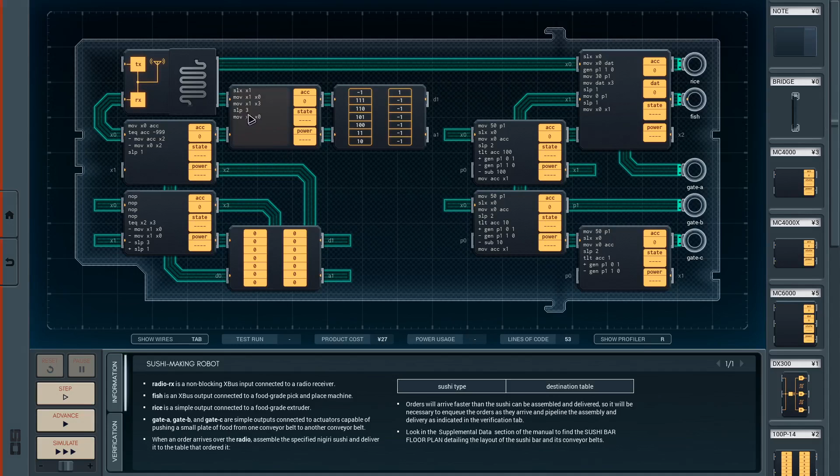Gen P1, 1. Do I need to sleep or something? Yeah, there's some sleeping involved. So this is going to improve every graph. That'll be very nice. You sleep 3 and then you send the data. Okay, so you sleep the first, of course. Oh, and I don't even have the sleep 3 in here.

Great. Can I get away with more sleeping? Or will this fail? That will fail. Okay, so no I can't. Alright, that's fine. Okay, well, that's a real nice improvement.

So yeah, it just reads from here whenever it's ready to serve it. It'll sit there in the queue for a moment, but instead of making my own secondary queue on top of this one, I can just use the built-in one in the radio. There we go! Now this is a good solution.

Beautiful. Okay, so power usage all the way down there, lines of code down here, product cost down here. Hugely beating the average on everything. That's fantastic. I got to the second average on power usage.

Alright, I don't want to spend more time. I want my fourth graph to also be to the left, so I'm not going to spend any more time on that, but that is a satisfying improvement on that. Yeah, look how much better these all are. 2 ticks left, everything. Cool. Alright. Thanks for that tip.

Yeah, so, just a thing I had forgotten, apparently. As promised, I have a serious job for you. You're the one I fed, whose kitties I fed.

There will be custom displays to report current status of each component for monitoring and control of my thorium reactors. A bit more interesting than cats, maybe?

I was interested in your cats. You gave me a cool picture. Let's look at it again. Cute kitties. Yeah, I don't know who the third one is still.

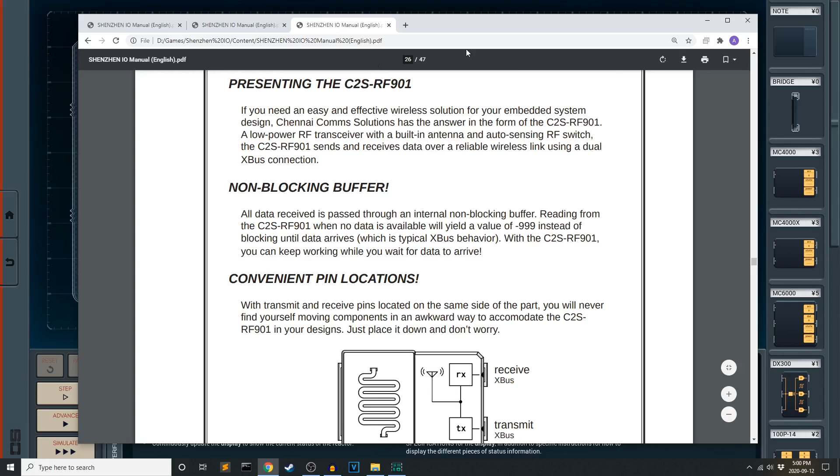So, thorium reactor status monitor. I want to say there's a spec for this. Thorium salt reactor custom LCD spec. Yeah, okay, check it out.

It's this thing. Error is an X-bus input indicating the current reactor error, if any. Okay. Blocking, because it doesn't say non-blocking. Great. So those are both good in their own ways. But yes, note that this is blocking. Power is a simple input indicating the current power output of the generator. Temp is a simple input indicating the current temperature of the reactor's core.

This is sounding like a pretty dangerous project.

Control is a simple input indicating the current state of the reactor's control.

No, thorium reactors are extremely much safer than uranium nuclear reactors, I happen to know. Also, I think thorium reactors are slightly theoretical currently. I want to say that's in active research, but might not actually have a working implementation in the real world at the moment. Not sure about that part, though. My brother knows a lot about this stuff, but I don't.

Control is a simple input indicating the current state of the reactor's control rods. Display is an X-bus display output corresponding to a Lux 900C custom LCD.

Continuously update the display to show the current status of the reactor. To turn on a display segment, send that segment's ID to display over X-bus. To turn off a display segment, send that segment's ID multiplied by -1.

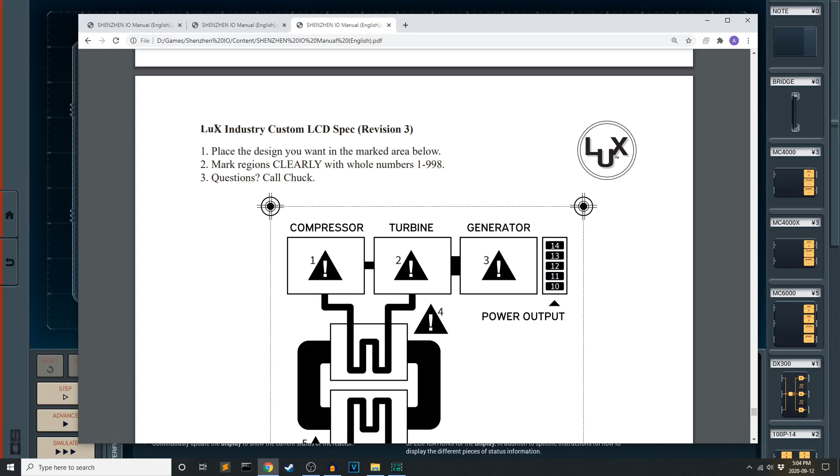Call Chuck. Okay, it is Lux. I said it right. Lux Industry Custom LCD spec, revision 3.

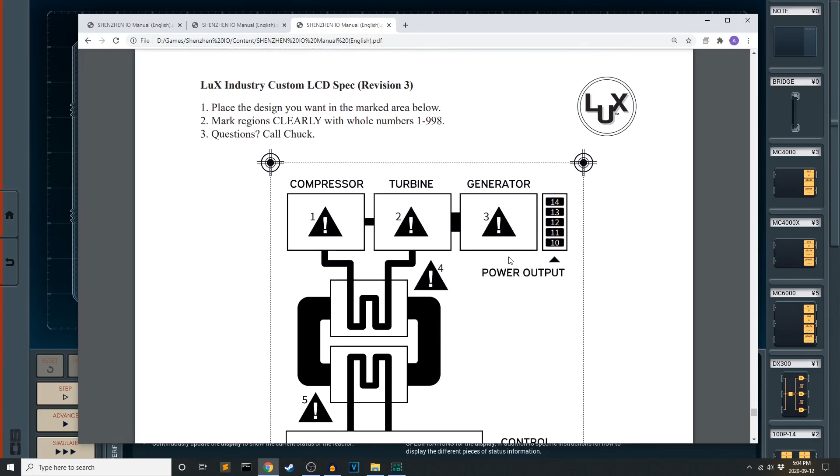Okay, so one control rod there. So you're saying control rods, okay, so these are LCD segments. Okay, and this is how to map those.

Alright, so I'm going to have some thresholding, because I can't really do a divide by 20. Can I do a divide by 2? Didn't I have a thing where I did a divide by 2 and it wasn't too much of a pain? Yes, multiply by 5, DGT1. To divide by 20, multiply by 5, DGT2. Okay, so multiply by 5 DGT2 and I would get an index of these.

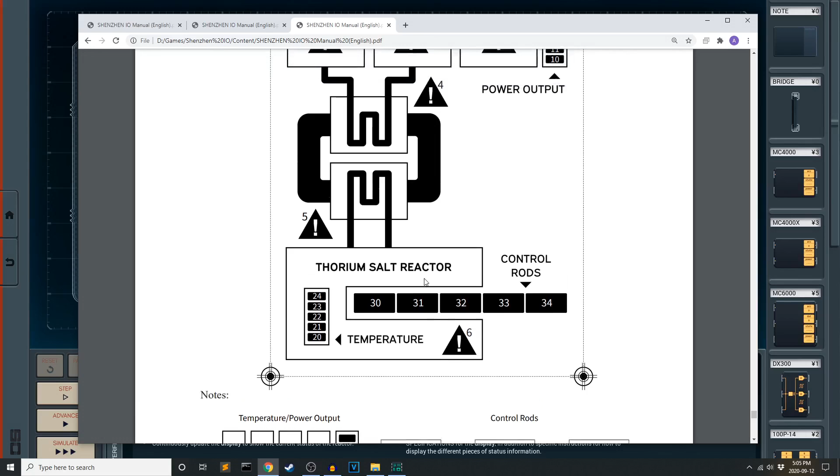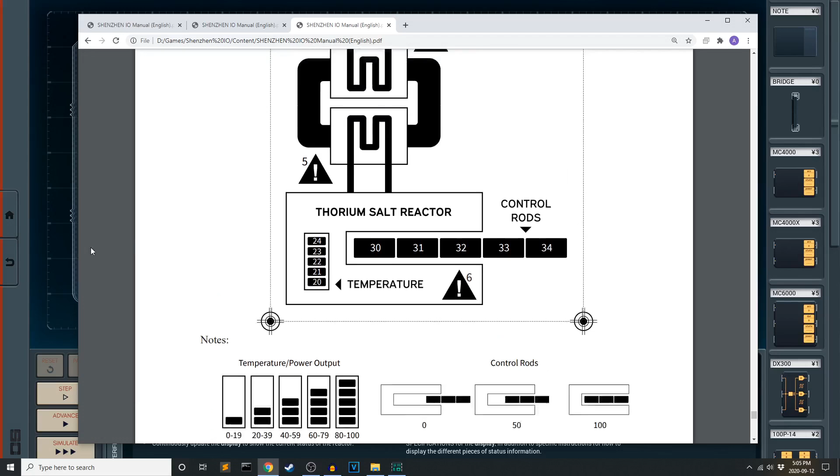However, no, it is not that simple. I have to set 20, 21, 22, 23, and 24 to display anywhere between 80 and 100. Also, 100 is a legal value. I guess I could do for anything 4 or above, I do all of these, if I'm processing my numbers that way. Okay, so I think I get it.

Oh dear, you know what I just noticed? Board constriction, huge thing on the board. Little bit of space to work in over here, bunch of I/O pins that are going to be a pain to route. Alright, so this is a severe space crunch for a heck of a lot of logic for LCD control.

1, 2, 3, 4, 5. What are 4 and 5?

If a reading from error provides a value, it's blocking—no negative 999s there. I have to wait for error. If a reading from error provides a value, send that value to the display unchanged.

Turn on the corresponding error indicator, positive, or off negative. So this just does it—if you get an error, just send it. That's pretty trivial. I mean, you can almost... could I?

No, it doesn't read it itself. It has to have data actually pushed to it. Well, but data is being pushed. Why doesn't that work? Feels like it oughta.

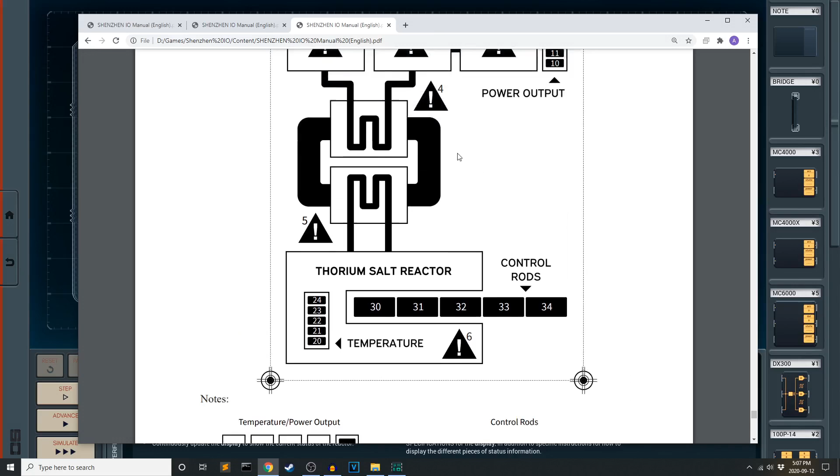Okay, so we got temperature, power, control. Temperature is this gauge, control is this gauge, power is this gauge. So we just got really 3 things. No, control rods is weird. Temperature and power are both like this, but control rods are different—0, 50, 100. I'll assume those are the only valid values.

This sounds an awful lot like a time when I might be able to use logic gates. This feels like a logic gate use case, maybe. How does this thing work?

What can I edit? All of these? Okay, so those are radio buttons, these are checkboxes. What's this symbol? That's an OR gate, that's an AND gate. It's a NOT gate with an extra little dot.

I don't think that's what XOR looks like. Maybe I'm wrong. SR... set read? I would expect RW, read write, if that's what it is. I don't know if I want to go into that realm, but...

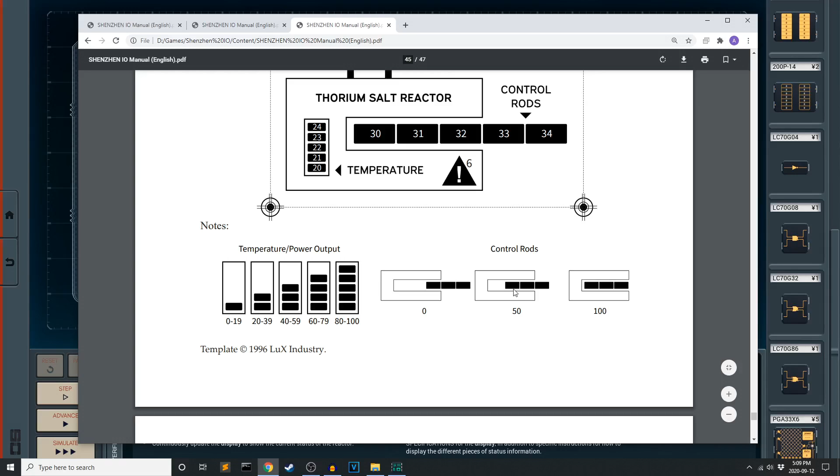Let's see, why do I think logic gates are right for this? So this segment here is on only if control rod is 100. This one here is on if control rod is 50 or greater. This one here is always on—literally always on.

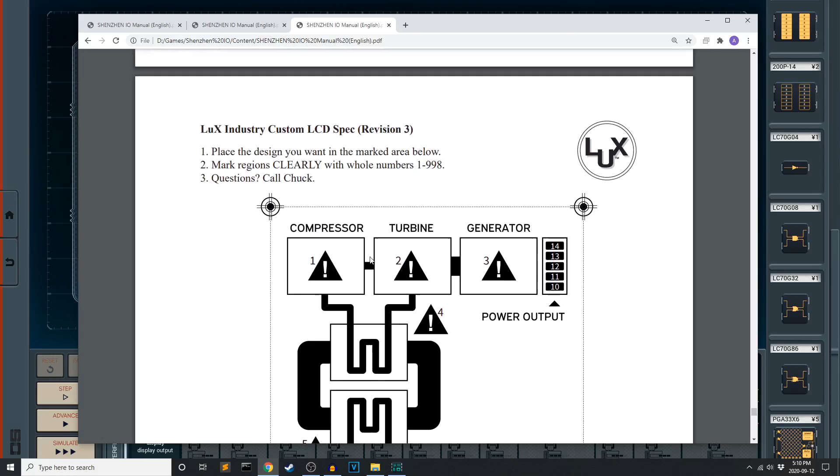I don't care about any of this—this is all just error stuff. I pass it unchanged, it controls itself perfectly, but just wiring those directly didn't work. If I add my own push, does that help somehow? Strangely, yes.

But I just can't wire directly, because those were not blinking when that happened. It just doesn't read. Okay, so for some reason that's insufficient, and I don't actually understand why. I really feel like that should work, because this writing to that should be identical to a microcontroller writing to it, but somehow it's not. Okay, but other things need to be written to that.

So the overall structure of this is that a dude here sends information in. I can do this and it's fine. That can escape. Sure. Okay, so here's a thing—someone needs to SLX on the error line.

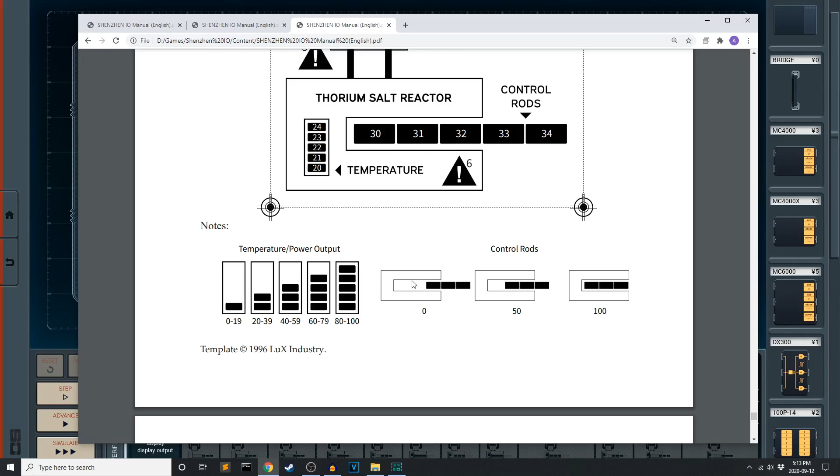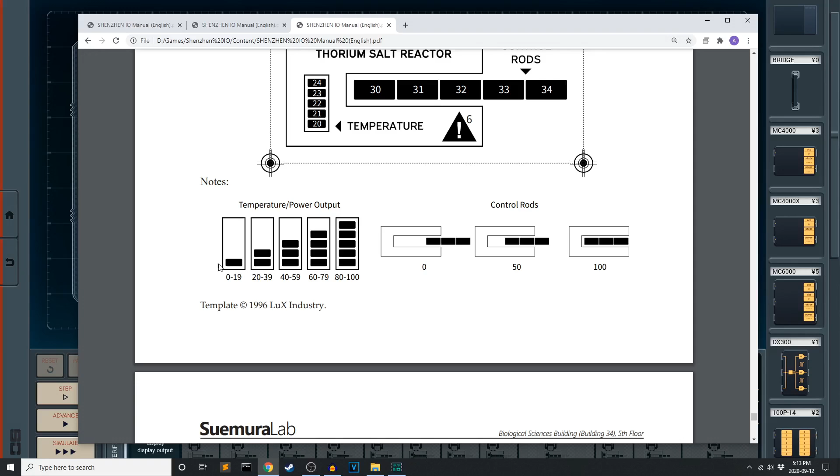I don't know if it'd end up being more efficient for message send efficiency. I would remember the last state of the LCDs and only send turn on, turn off commands for the delta between that and this. I probably won't bother doing that—I'll probably send redundant ones for every state change, or maybe even every tick.

So this will be fine for error handling. Yeah, that's all I need for error handling. You're not even involved, you don't have to care about the timing of this. You can't really do anything else since you're SLXing on that, so that's just a microcontroller, just for error.

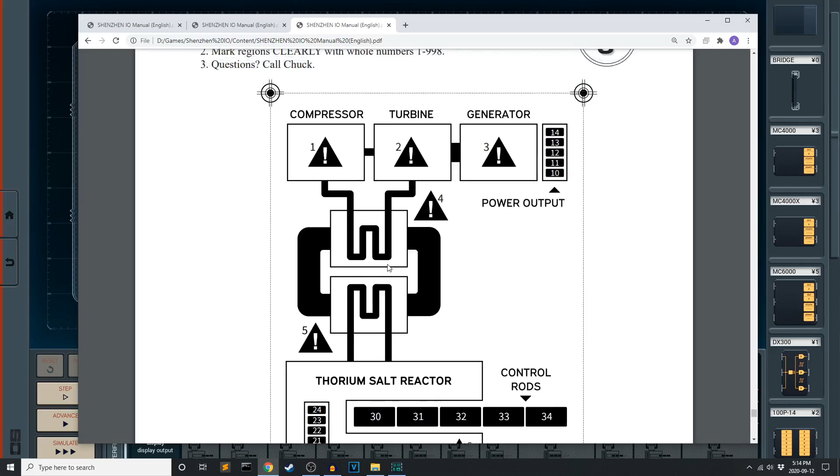So that's fine. Yeah, and you would never read from X3, so you can't disrupt that. Okay, so anyway, that takes care of this section. Let's think about control rods, since that one's unique.

So, control. Simple, alright, so that's convenient. Power and temp... Let me see if I can do this with one of these little dudes. The answer is obviously no. Why would I even try that?

Okay, so I want to convert... Really, I just want an index. 30, 31, or 32. I'll send that index and the next two... Okay, no, that's not actually what I want.

What are you even gonna do? Just receive messages from everywhere and pass them on, I guess. Like, you're essentially just an I/O expander at this point, right? Because you'd like... no, you can't SLX on multiple things.

You might not exist. Like, a bunch of dudes are probably just gonna... No X-bus collisions will happen because these are all single item messages, so it's fine for everybody just to gang up together and talk to this. Okay, but I do note that it is very convenient to place one of these here.

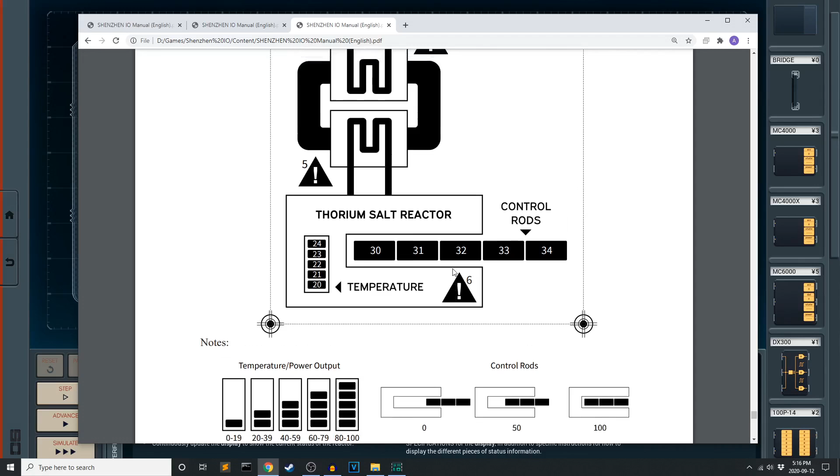Okay, so how do I actually do any logic at all here? You know what, let's work on temperature and power first. Let me write a function for... Yeah, okay, that'll be your purpose then. You receive... Oh boy.

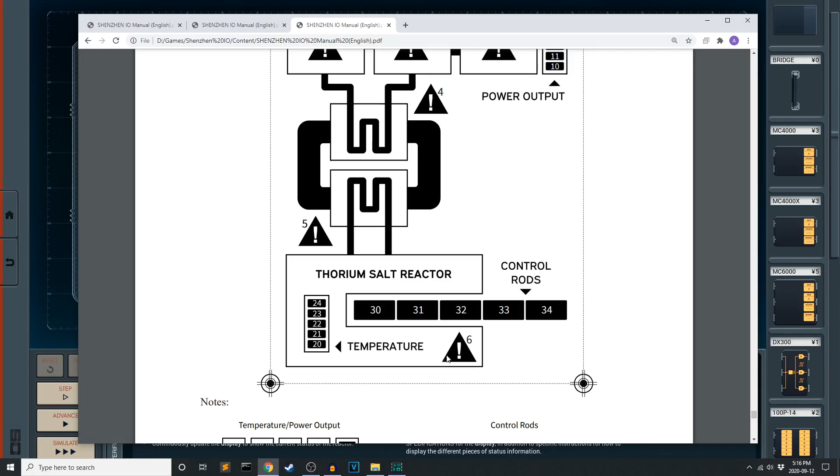That's an error thing, yeah, so just error might tell me about that. So 10 through 14, 20 through 24. Okay, so temperature and power, 0 to 19.

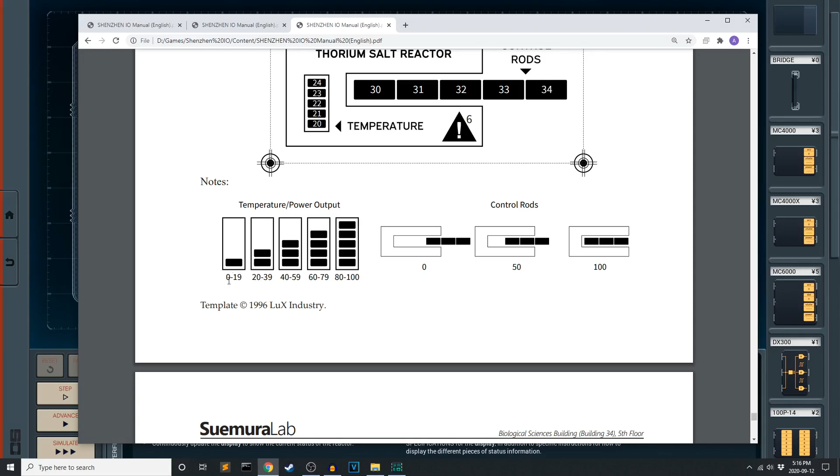Right, so I'm not thinking about control at the moment. I kind of just want to do the same thing with two... Okay, so something like... Sure, that works.

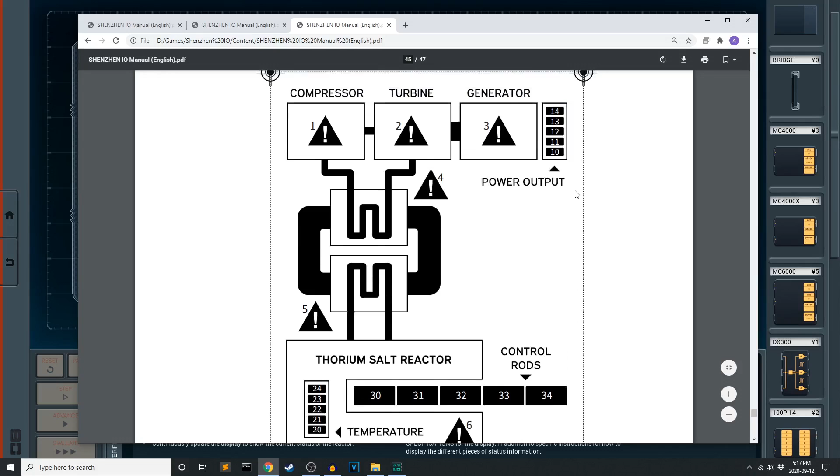Okay, so I would move... Alright, so for power, first index is 10. Move 10 to x1, move p1 to x1, move 20 to x1, move p0 to x1. Okay, so this function call takes a parameter which is the starting index of the LCD, and then a 0 to 100 value. Maybe I can do better.

Can do it once. Can't do that twice, though. Okay, well, I can do this. That would actually be fine.

Yeah, I mean, those are going to happen in an arbitrary order, which is completely fine. Don't got a lot of space for control logic. You can move up a bit, theoretically. Like there's some space up here that's being stolen away from me by this wire, but I can reclaim it probably. I might not need to.

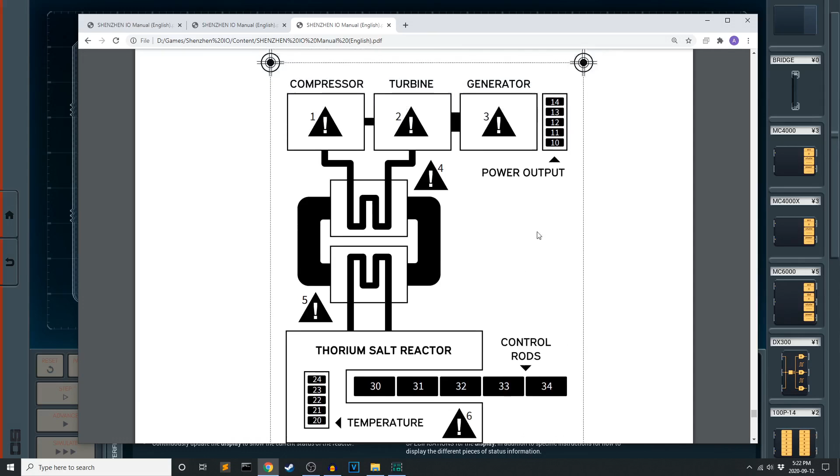I don't like having those in reverse order. Okay, I don't know if I want that. I might, though. You probably don't want a daisy chain onto there. It's more likely I want you to do this, but then part disconnected to self. Okay, I don't know about this, but for now that's what's happening.

Okay, yeah, so you only need to operate on 21, 22, 23, 24, 11, 12, 13, and 14. Sure. So right, you get the first number in there. Well, let's do this then.

Oh wait, no, you do need to be told always, because if it is at 0, they need to turn off those, right? Okay, so x1, what? What's x1? You know, x0. Alright, so x0, ac.

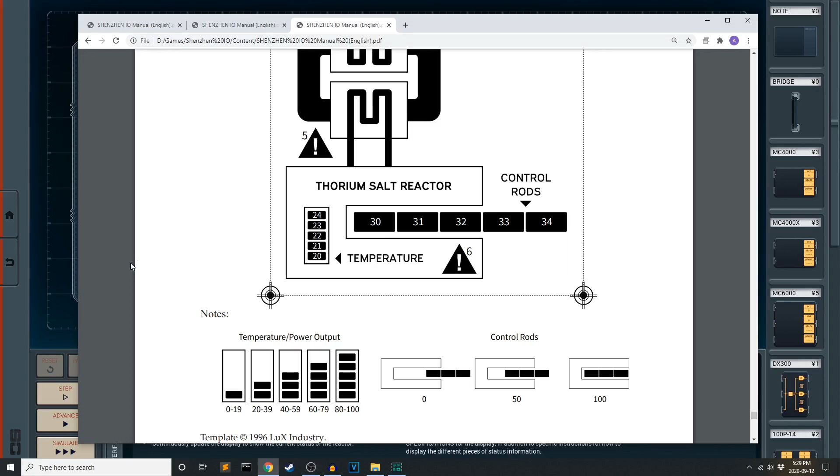See, now hang on, negating is actually not that straightforward. I can sub ac, but then if I sub ac again, I just subtract 0. Wait, I can mul -1. I can mul -1, just mul -1. Negating is simple, you don't need a negate command. Just mul -1. Easy. Okay, great.

That's fine then. Okay, so then this becomes easy. So, tech... A0 ac. Oh, right, so you had a sub 1, you need one too. Great, take A0 ac.

Plus mul -1. Oh, actually, A0, x1. Move 0, x1. Oop, take x1, ac.

So right, number coming in here is an ac, but that's no good. No, that needs to go to x1, I think. Or something? Well, it works either way, really.

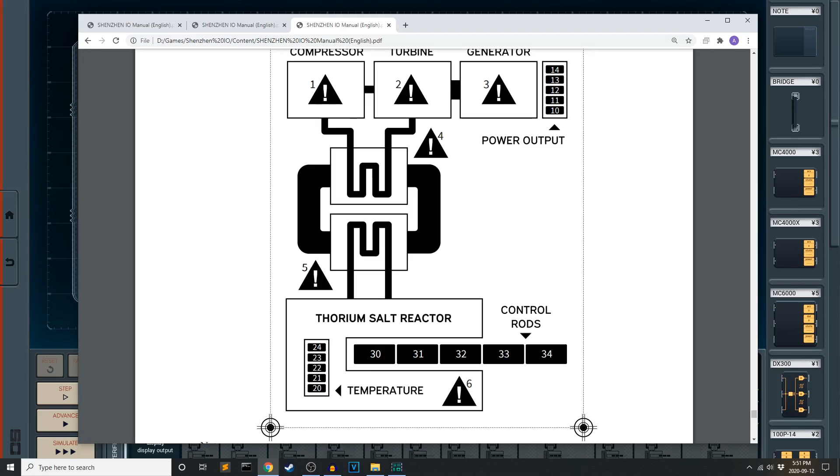Make this a little roomier. And, right, so the control rod 32 is always going to be on. Move 32, x1. Great. So space that out just so you do it since you happen to have an I/O line there. I don't need these lines free in here, but just a central place for initializing LCD segments is nice here. Yeah, so I think I can just do a really dumb thresholding for turn on, turn off for this. Sure.

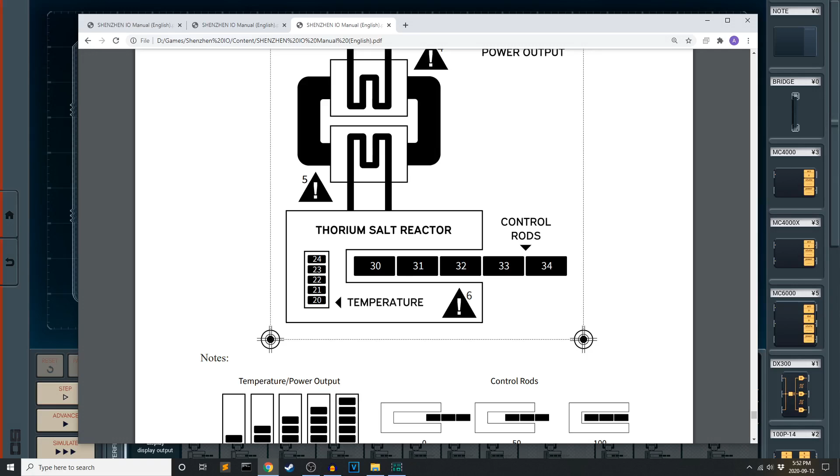TCP P0. Okay, so 0, 50, 100. Can I TCP? 31, 33, 34. So there are 3 states. Yeah, okay.

So, minus, yeah, okay, and then I can do a TCP P0 50 for the remaining cases. Okay, so in the 0 case, I'll just send, yeah, okay, I'm gonna make this as dumb as possible. It knows basically nothing other than when you get 0, send -30, -31, 33, 34.

There won't be enough room for this. Or will there? Probably not. Okay, no, I'm thinking of this wrong.

TCP P0, I can do it simpler, just do it per segment. TCP P0, 100, move 30, x2, move minus 30, x2. Here we go. TCP P0, 0. So that's for this, that's for this segment.

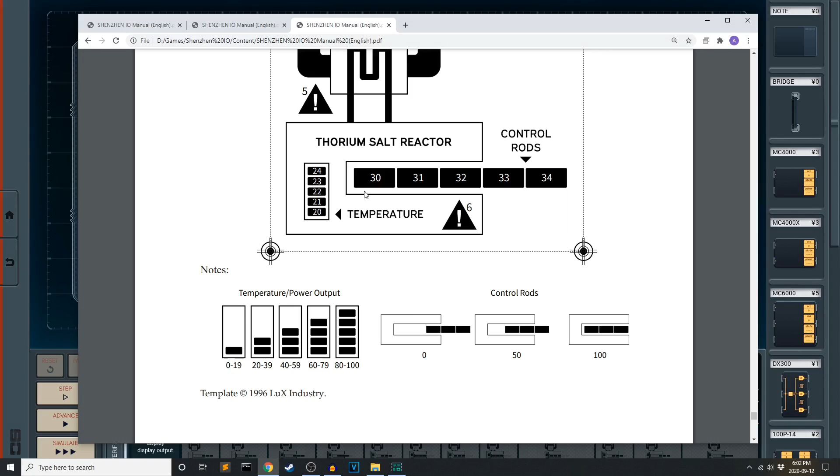So 0 means negative 30, negative 31. I never touched 33. Negative 30, negative 31, 33, 34. Commas don't fit. 50. Negative 30, 31, 33, negative 34. 100. 30, 31, negative 33, negative 34.

All of those need to change. Okay, so the ones that are the same when less than 100: negative 30. The ones that are the same when greater than 0: negative 34. I'm going to rewrite this. Okay, so TLT P0 100, negative 30, x2. Move 30, x2. TGT P0 0, negative 34.

Okay, so that covers the leftmost and the rightmost. However, also, those other two are expressed the same way. Yeah, okay, it literally is just these two things. Let's see, P0 100. Okay, so less than 100 for this means 33. Greater than 100, or equal to 100, means negative 33. Okay? Yeah, it really is just this. I just had to set up that little table. P0 means 31. So it's one positive number for that and one negative number for the other one.